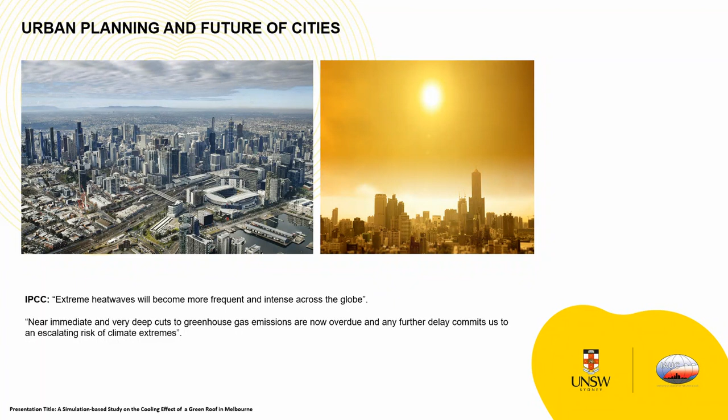Okay, so we are in a very complex situation. We are living in cities that are expanding at a very, very rapid rate. And that's why we are exposing ourselves to increased urban overheating. Urban overheating is not just the adverse impacts on the peak electricity demand or on UHI. It's also on the public health of the elderly, those with cardiovascular disease, and especially those with low socioeconomic background, whose housing doesn't even have an air conditioning system to be turned on during the heat wave.

So the first few days might be okay because the indoor air temperature gets to somewhere 27, 28. But as the heat wave days increase, and the air temperature exceeds a certain threshold, then we will see an exponential increase in the heat-related mortality and morbidity rates. So that's why it's very, very important to think about

mitigation strategies. And we've seen heat waves all around the world: Chicago, Eastern Europe, Melbourne 2009, Black Friday, and the most recent one, January 2019, where in the northern part of Victoria especially, we saw temperatures exceed even about 45 degrees.

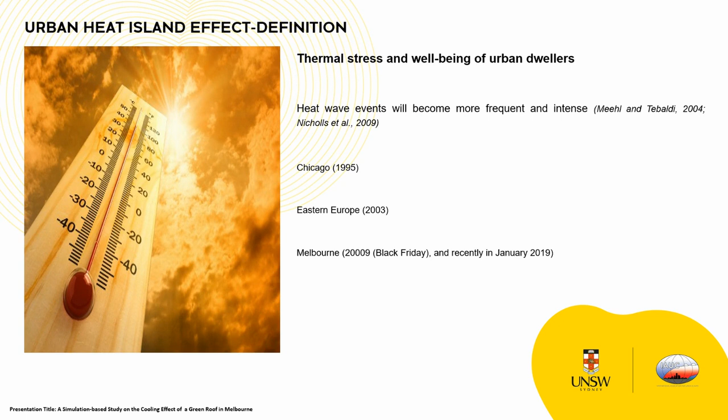If we have a closer look at Melbourne, we are looking at having a population of 8 million by 2050. And what it means is construction boom, infrastructure boom, a lot of replacement of natural vegetative coverage with impervious surfaces. So obviously more hot days. And looking at UHI history in Melbourne has shown that there is a record of temperature difference between the CBD and the outskirts. That ranges from 1 up to 7 degrees based on the methodology and the instrumentation that they use in their research.

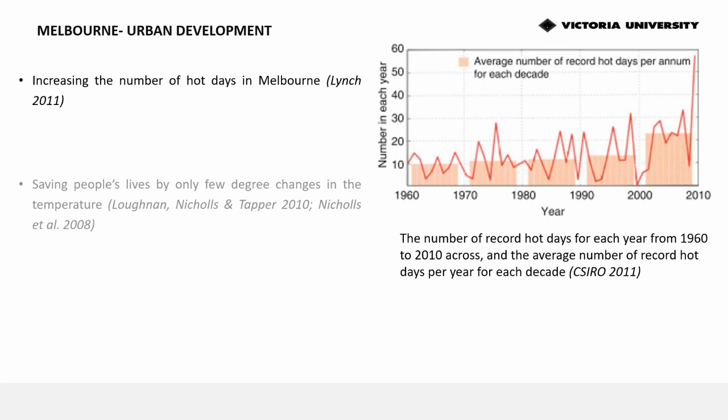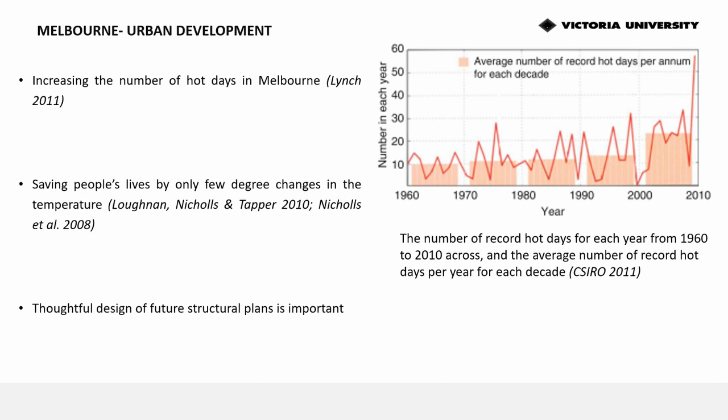So this project that I'm going to talk about today, if I want to classify it, will be under mitigation strategy, green infrastructure and green roof strategy. So City of Melbourne has developed and implemented a number of different greening initiatives across the years. Plan Melbourne 2015 was the first one that I was involved in a long time ago, and this is one of the recent ones, if not the most recent, which is looking at some of the greening initiatives that Melbourne City is planning to do.

So this time it's not just about doubling up the green roofs and green walls, but it's also about finding a partnership between private and public sectors to co-fund the greening initiatives. Or it's about developing industry standards in order to smooth the process of installing green roofs or green walls.

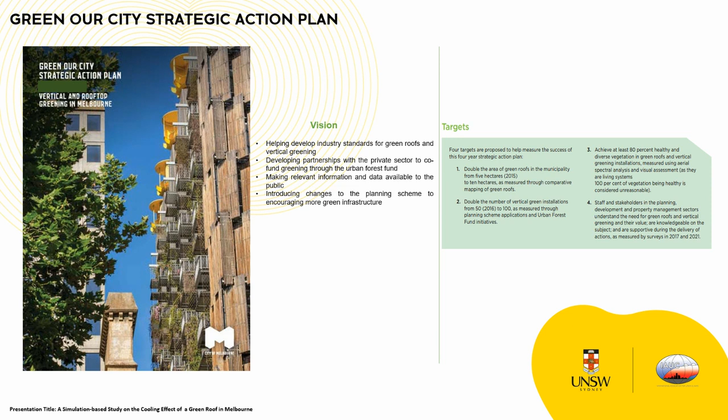So as a result of the vision that you see in front of you, there are targets, and as a result of targets, we have action items. So the project I'm going to talk about today is really the first action item, which is looking at greening our rooftop project. And the second one is about greening the laneways in Melbourne. If you've been, you know there are lots of beautiful laneways with a lot of shops, restaurants, and cafes. So the second action item is looking at greening those laneways.

And the third one is looking at making the information accessible and publicly available for people so they can see, okay, these are the areas that don't have greening, so let's think about them. Okay, so in order to promote and encourage the communities to actually get involved in the greening initiatives.

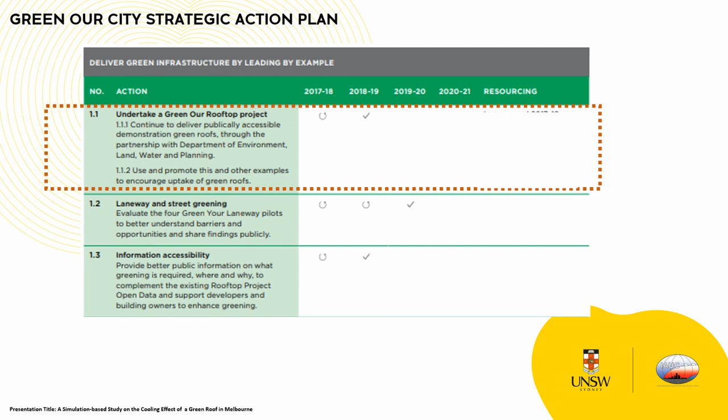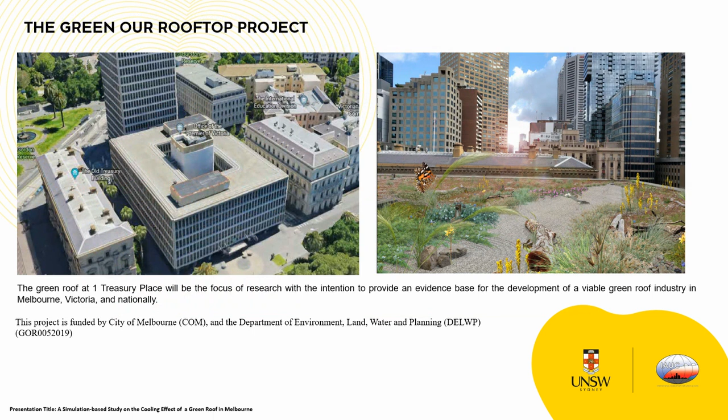So the Green Our Rooftop project is looking at greening the Treasury building, and the Treasury building is this photo that you see in front of you. It is a state government building. I'm not going through the long process of why they selected this building, but long story short, this building was selected because of being situated in a high-profile site. So it could maximize the exposure to the public, which could promote one of the core objectives of this research, which was inspiring others to have their own green roof so they can actually see the benefits of it.

So why is this project important? One of the novelties about this project is its design concept. Well, I'm actually paying a lot of attention to the design concept because I'm an architect and urban designer by background, and my research is in environmental planning and design. But one of the novelties of this project is its design concept because they wanted to bring a garden of Victorian landscape onto the plan of a green roof.

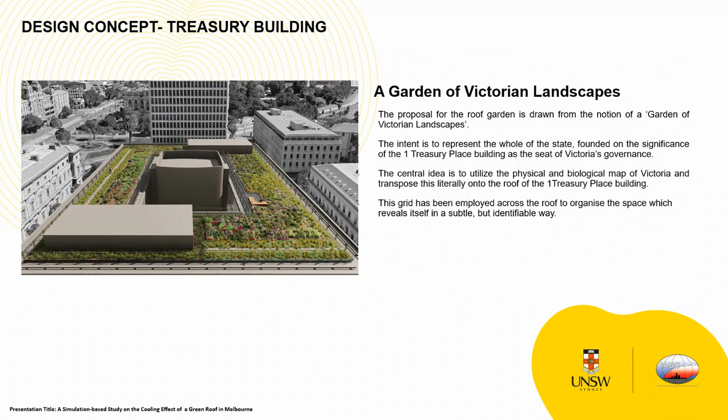And what it means is that in Victoria, there is a very diverse range of plantation and landscape, and they wanted to extract that and build it onto a map of a green roof. So they actually used a lot of grid pixelation algorithms, which I'm not going through in depth and detail, but enough to know that we have this color-coded map in front of us with 67 different plants. And I don't remember how many bioregions we had, but it was quite a complex green roof to model.

So it wasn't just the diversity of the plants, which was the focus of the research, but also the topography of the Victorian plains that they were trying to bring into this green roof plan. So the designers used the elevation from sea level across the state and abstracted it into a map of the green roof with 4 different heights.

So if you have a look at the cross section of the green roof, you can see there are bioregions which are higher and bioregions which are lower. So the higher ones are trying to mimic areas like the Gippsland Highlands, and the lower ones are trying to mimic the other areas that are lower in topography.

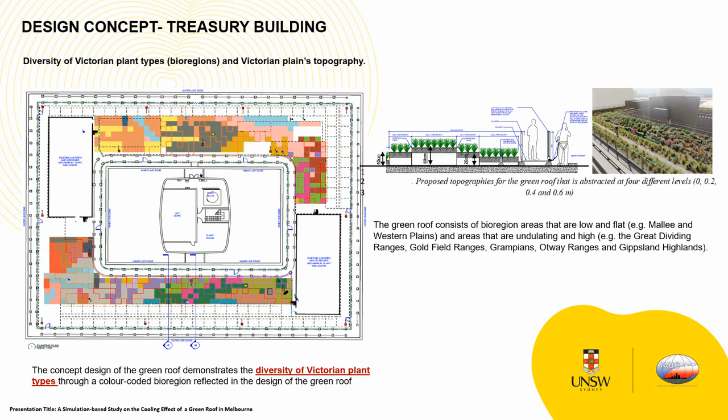So what we were trying to do in this, okay, 5 minutes. So what we were trying to do in this project was to see how this proposed green roof can actually impact the air temperature at the rooftop level, and how the design settings of the proposed green roof can be further optimized to maximize the cooling impact.

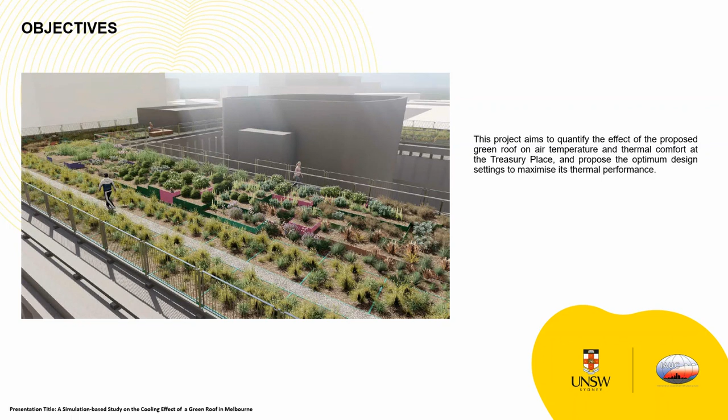Because the project was in its initial phase and hadn't been implemented yet, there was a place to look back at some of the design settings of the green roof to see what could be done. We also had a look at pedestrian thermal comfort, not just at the street level, but also at the rooftop level, which I'm going to show you.

But before that, for our data collection, we used the weather data from the closest BOM station located in Olympic Park, and we also used the climatic data from the portable weather station, which was installed at the rooftop level, because we obviously wanted to have access to the local climatic data as well.

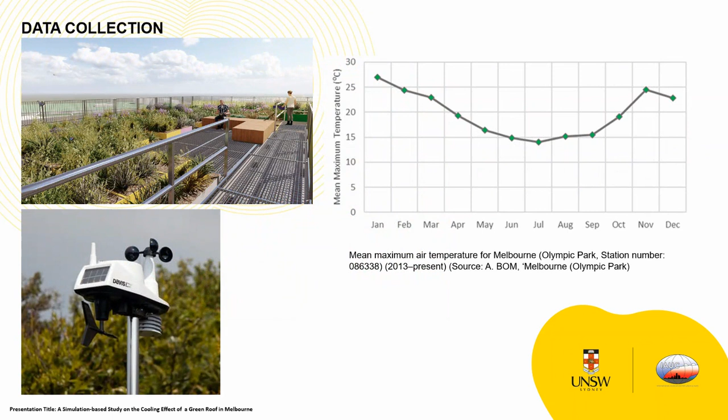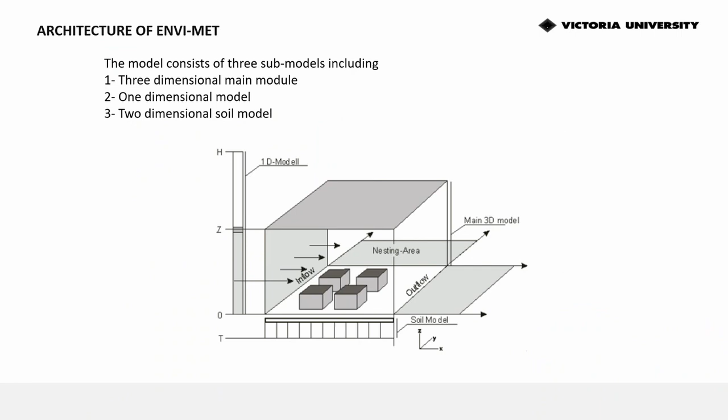So we used ENVI-met for a number of reasons, which because of the lack of time, I'm not going to talk about. But I think one of the key reasons was the need to have a high resolution map at the end in terms of the spatial distribution of the air temperature. So I think that was one of the main reasons, given the diversity of the plants that we had. So we started with setting up the input area file, the configuration file, forcing the weather data, and we started with the base case scenario with no green roof.

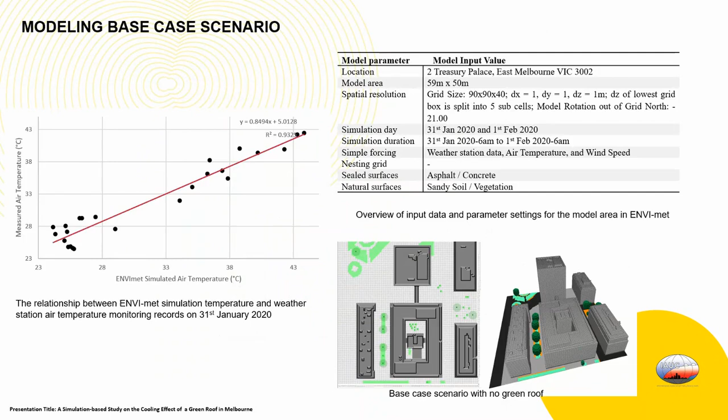So that's what at the moment exists at the Treasury building. Obviously, after each simulation, there should be a verification. That's a must, non-negotiable. So we actually compared the air temperature recorded with the simulated, and we achieved quite reasonable agreement, with an R score of 0.9. That's why we continued with simulating the proposed green roof scenario.

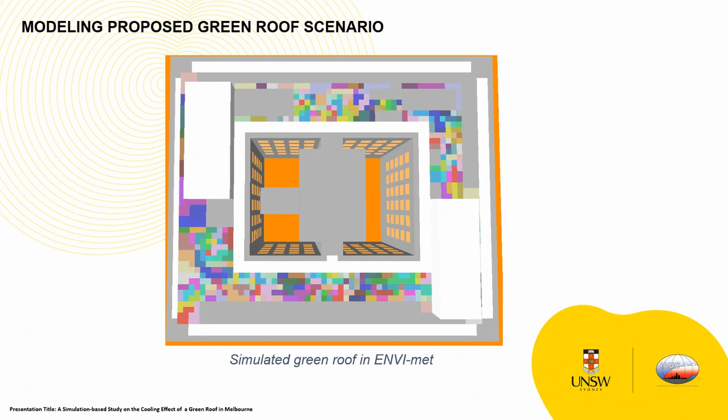And this is where I think it was the most challenging part, because in ENVI-met, within the tool itself, yes, there is a database of plants, but because this tool is mainly developed in Europe, most of the plant databases are from Europe. But we're dealing with the Victorian landscape, right? So there was a need to go through the database, and that's why we actually developed a Python-based script to make that happen. And we started modifying the plant features to mimic this as much as possible. Not always possible in certain areas, I should confess, but at least mimicking the closest scenario to what they're proposing.

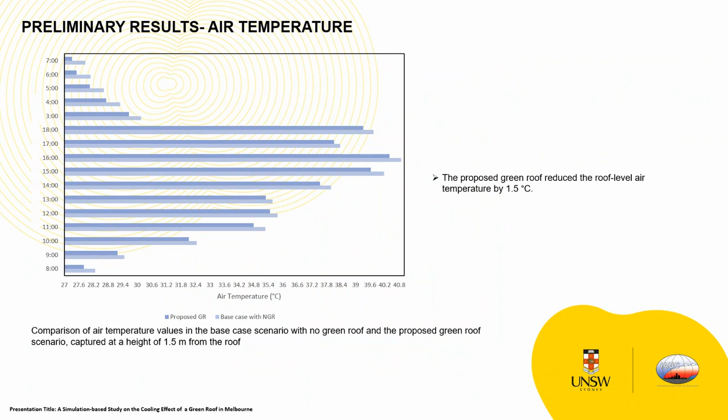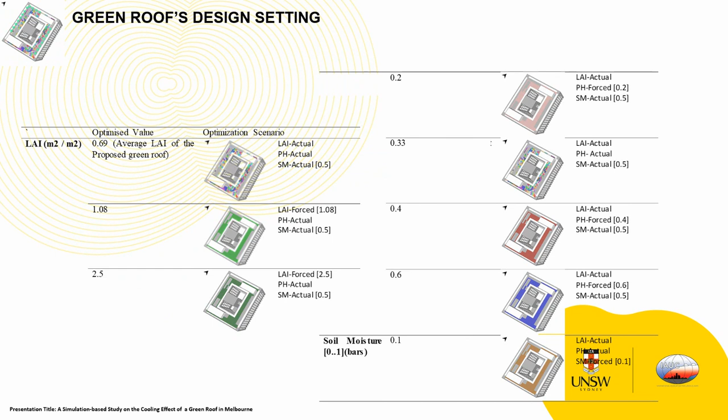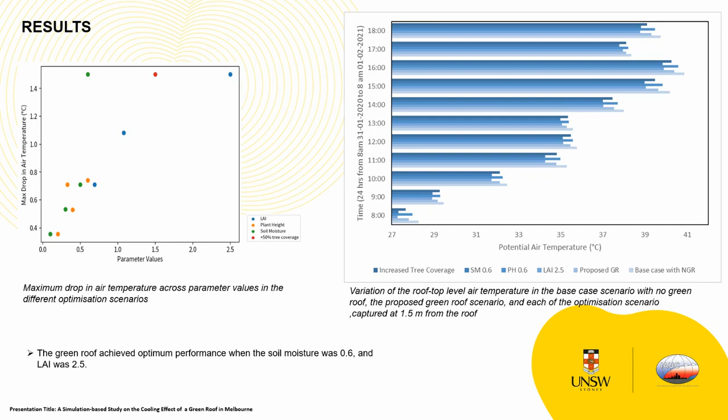So our preliminary results show a 1.5 degree reduction in the air temperature at the rooftop level. And we also looked at some potential optimization scenarios on some of the design settings. So we looked at parameters such as leaf area index, soil moisture, and what could happen if we combine this with tree coverage. We are running about 25 different scenarios at the moment to see which one can be further optimized. But our preliminary results show that if our green roof is well irrigated and the leaf area index is set at 2.5 average, then we could receive the maximum thermal performance.

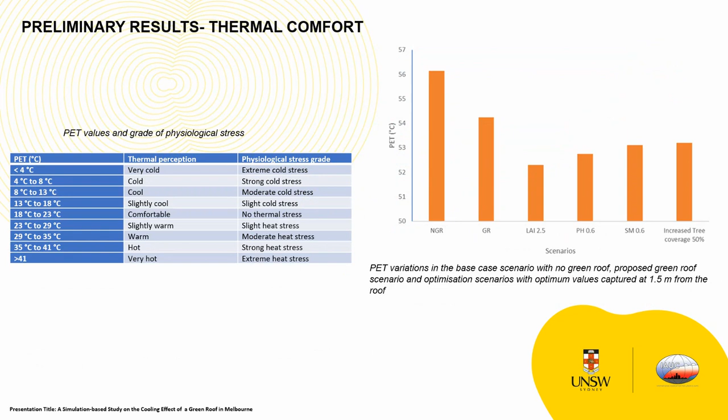In terms of thermal comfort, similar to the previous studies, no significant difference at the pedestrian level, but a slight reduction in physiological equivalent temperature at the rooftop level, but not that significant.

So I'll just wrap up by saying that this project is just a small step towards achieving what we are planning as part of our action items for the IPCC and all the agreements that we have. But there is a need to change not just what decision makers are thinking, but also what communities are thinking. That's why hopefully by the end of this project, we will have a forum where we can share the outputs with the community, because it's very important that the results are visible, not just nationally, but also internationally. So we are thinking of sharing the results of how to apply innovative greening technologies internationally, because every single nation is responsible to achieve climatic targets.